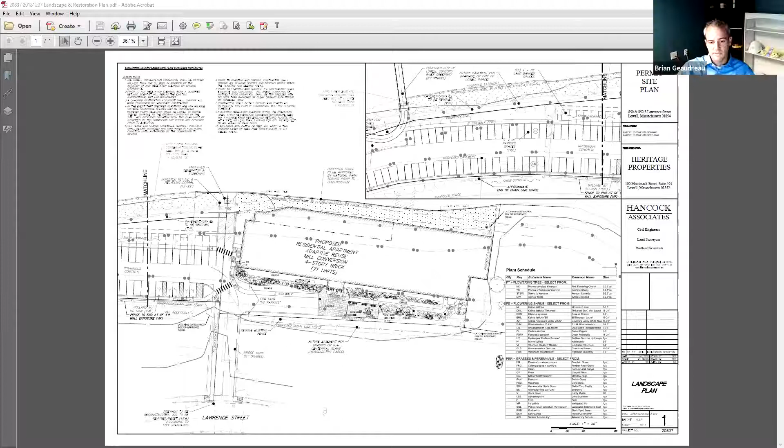I'll offer a motion to continue this request for certificate of compliance to the September 23rd, 2020 meeting. Motion made by Bill, seconded by Brad. All those in favor, wave or say aye. Aye. Thank you very much, Mr. John Joe. Thank you.

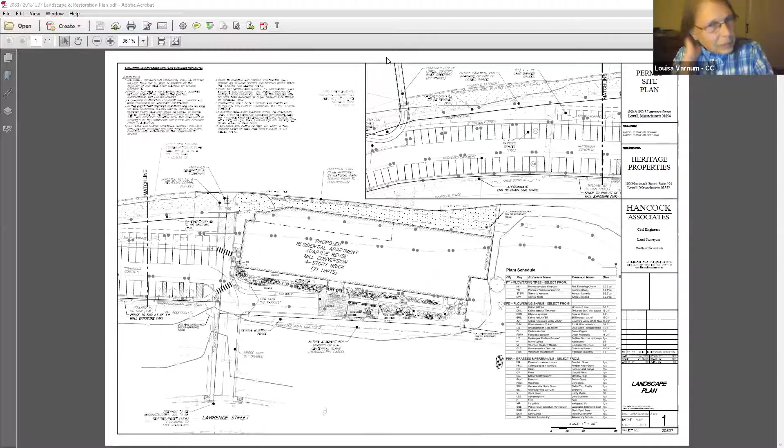Moving along on our agenda, we have a request for determination of applicability submitted by Hey Kim, 6769 Pratt Avenue, for a request to construct a deck within bordering land subject to flooding. This is the Middlesex Village area. We've got several projects tonight in this particular neighborhood.

I did take a peek there, but I didn't find anybody at home. Is Mr. Kim with us, or perhaps Miss Kim? Okay, can you tell us where you want to put your deck and how it's going to be constructed? Is it going to be ground level, up in the air, or what? We have a side deck right now that we just wanted to reconstruct.

It's just falling apart, the wood and stuff is falling apart, so we wanted to reconstruct the deck that's currently there. I don't think I saw the deck, is it on the side of the house? It's on the side of the house towards the back. I thought your proposal was right at the back of the house, I understand now. So it's a reconstruction of a deck.

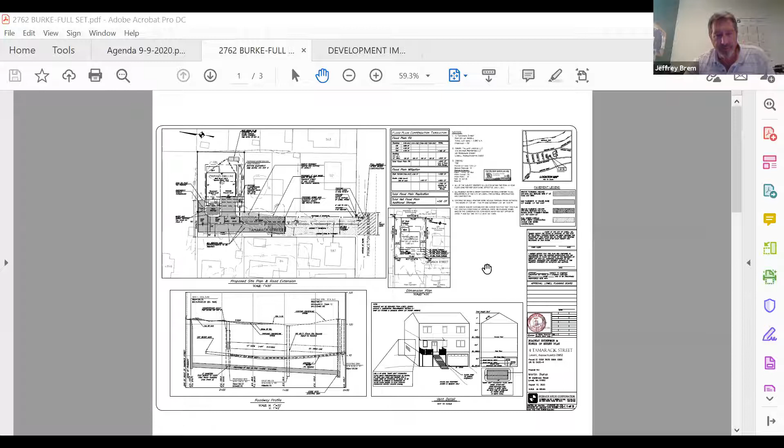Thank you, Scott. Madam Chair, would you like me to present? Yeah, Madam Chair, if I could share the screen - I think graphics are very important with this job. All right, this always happens to me. That's not what I want to share. Hold on a second, you'll have to give me a minute. I'm sorry, it should be here. Fine, all right, we'll try it one more time. There it is, all right. So does everybody see the screen? We see it, but it's very tiny. I'm going to zoom up.

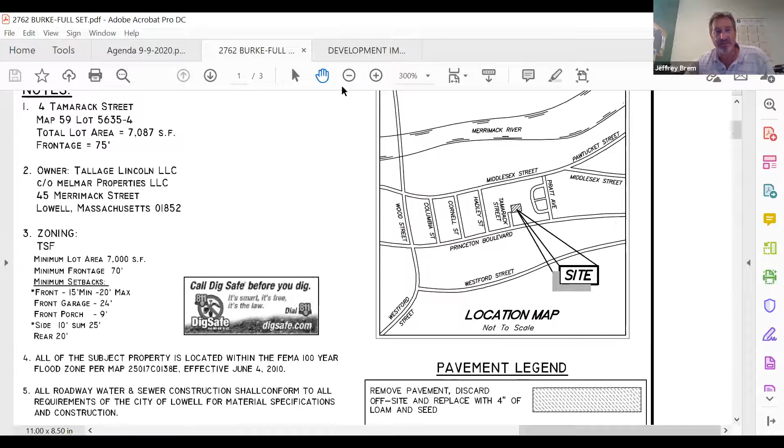So first, let me locate you on Princeton Boulevard. Here's our locus map to the right, and you can see Princeton Boulevard here, here is Tamarack Street. Some of the other streets in the area you may know are Hadley, Wood Street, and Westford Street. It's at the end of Tamarack Street - so this is the location. As John said, and as you mentioned Madam Chair, the property is 100% in the floodplain. Actually, Tamarack Street is partly in the floodplain too. So here's Princeton Boulevard to the right of this plan.

Tamarack Street goes in, and right about where the K is, that's the end of the pavement, and then this portion narrows up and becomes a dirt roadway. That's shown on the profile here.

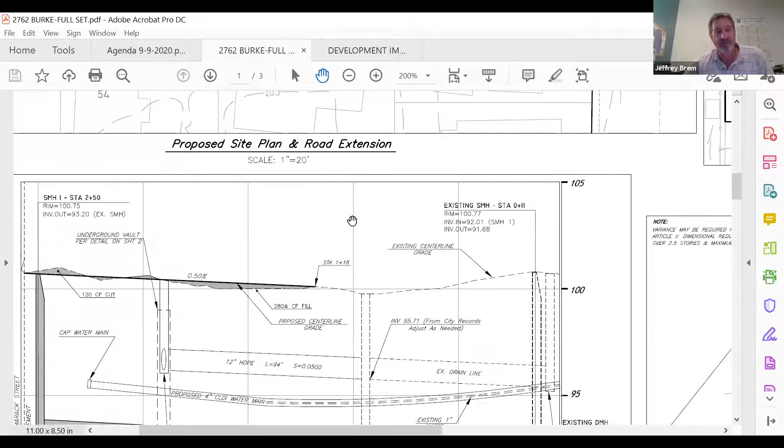There's the paved section, and essentially this is the dirt section here. You see some filling and some cutting. It's pretty marginal, but it doesn't matter whether it's marginal or not. If it's floodplain, it's floodplain, and we have to mitigate for that.

The property is currently a vacant lot, just over 7,000 square feet, 7,087. It has adequate frontage area. It's basically a buildable lot. The only issues are that Tamarack Street needs to be extended, and of course, we're working in the floodplain.

So in order to work on the floodplain, there's various programs that we've employed. The first is, the only work really that we're doing for the property is the foundation itself on the building, and we're mitigating that, which I'll get to in the storage component a little bit.

In the foundation, we are proposing 4 smart vents at various elevations, because as you know, if you're filling floodplain, you have to incrementally create mitigation at its incremental elevations. So there are 4 vents, 2 on each side. These are the elevations here.

Essentially, all a smart vent does is it's a hole in the concrete. It seals up the hole during times of no flood, but when there's flood, there's a hinge pin, and it opens up and allows any flood waters to go into the basement temporarily during the storm. Then, obviously, there's no heating systems under code in the area that's in floodplain. You have to have all your heating systems above the ground, above the floodplain, and so forth. So it's just an open basement.

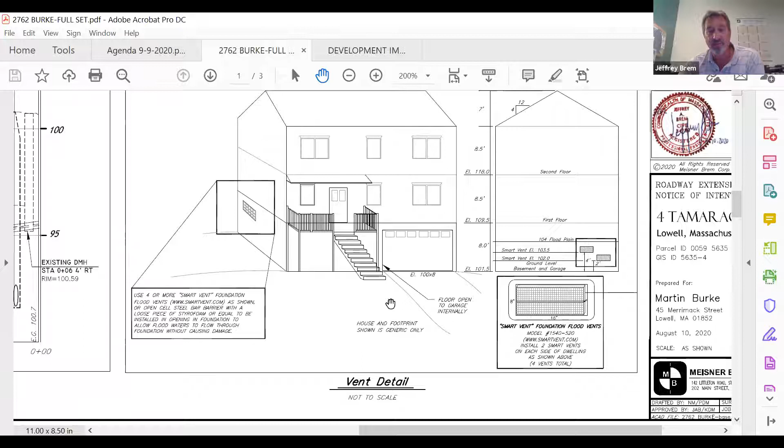So that's how we take care of that, and that's done several times in the city. However, as mentioned earlier tonight, the concrete itself is filling, and you've got to mitigate that as well. So we have basically a several system program for that.

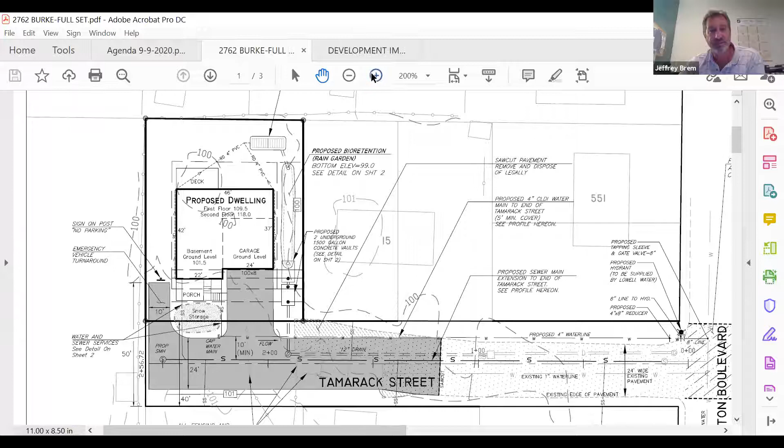First, as you see in the rear, we have roof infiltration drains. So the entire roof runoff is going into this Cultec system, plastic chambers, and they over drain into, and also the surface drain in this area. We're proposing our bioretention rain garden,

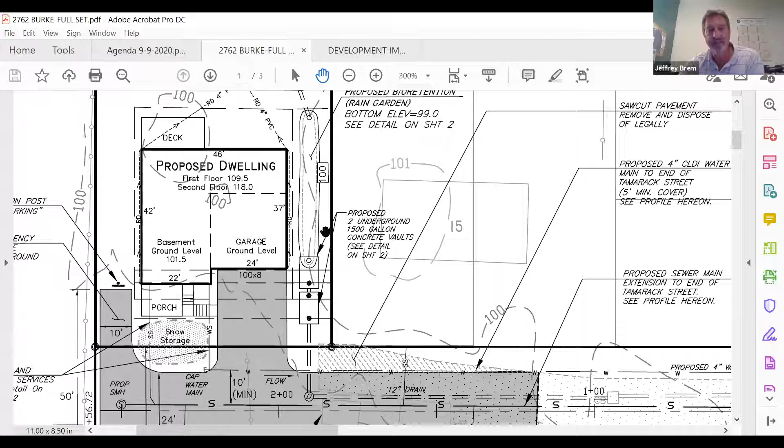which will obviously help mitigate the flow. It'll also polish the runoff from the site. And then that goes into these 2 chambers.

And this is what's unique about this property. The flood's going to go into the chambers at a certain elevation. And these 2 storage chambers, which I believe there's a detail here, we're on the next page. These 2 chambers will store the flow.

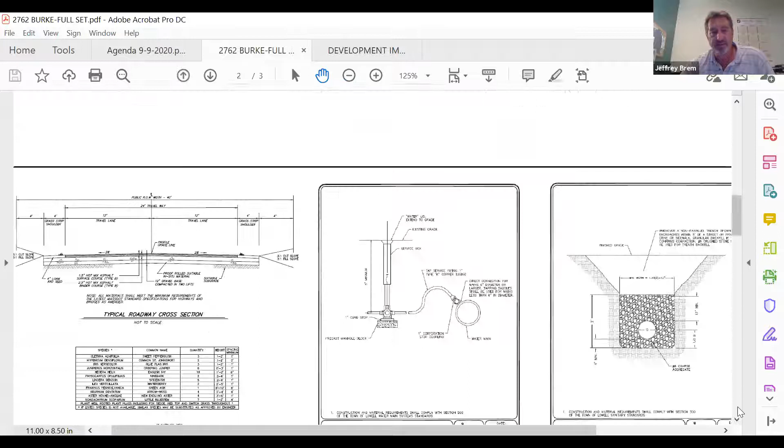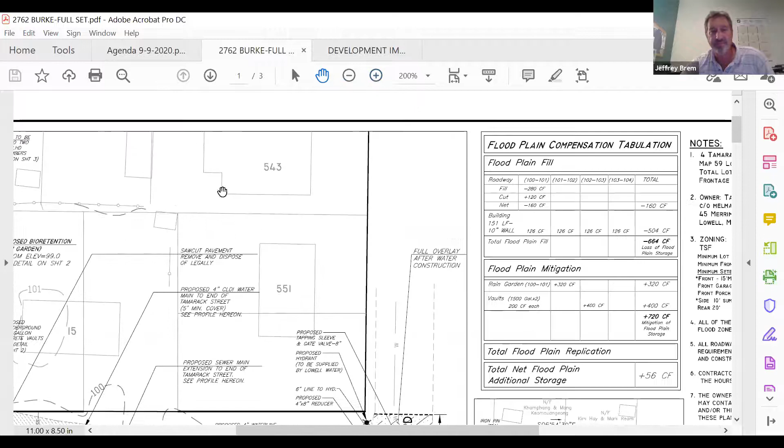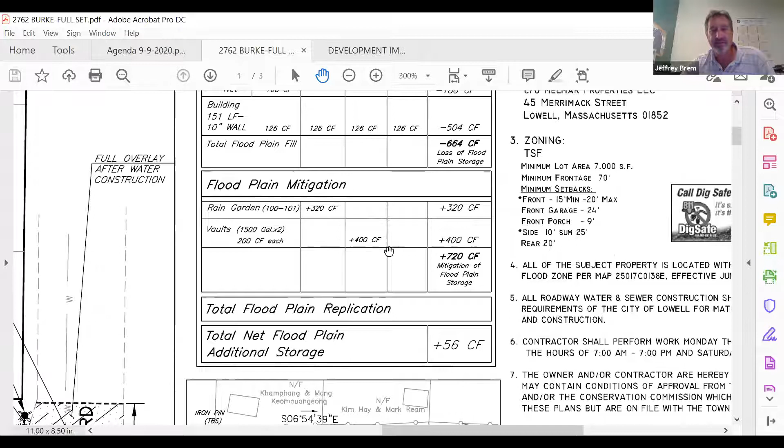As I said, some of this is in the roadway that we're losing some floodplain, some of it's in the building wall itself. Although these are small numbers, they are still numbers that we have to meet. So we have 664 cubic feet of loss of floodplain storage. And between the rain garden and the vaults, we're having 720 cubic feet of increased storage volume at its incremental elevations. So we have a net gain of 56 cubic feet.

The gain is not important. The important part is that we're mitigating for any loss of flooding.

John mentioned some other work, and just so you know, we are extending the water line. There's no flood issues with that, obviously, other than working in the floodplain. There's no filling. We're extending the sewer line, same issue. There's no work.

And we are putting a hydrant in, which will help improve the neighborhood. We're going to tie any properties that are not tied into the sewer. There's an existing 1-inch water line right now. The neighbors are going to get at least a 4-inch line. It's 8 inches up to the hydrant, then it's 4 inches. So that's why John had mentioned that there's sort of an improvement.

At the end of this is kind of a dumping ground. There's puddles that form. So all that's going to be resolved with the construction of a house on an approved, legally permitted property. That's it for me.

I'm sure you have some questions. Yeah.

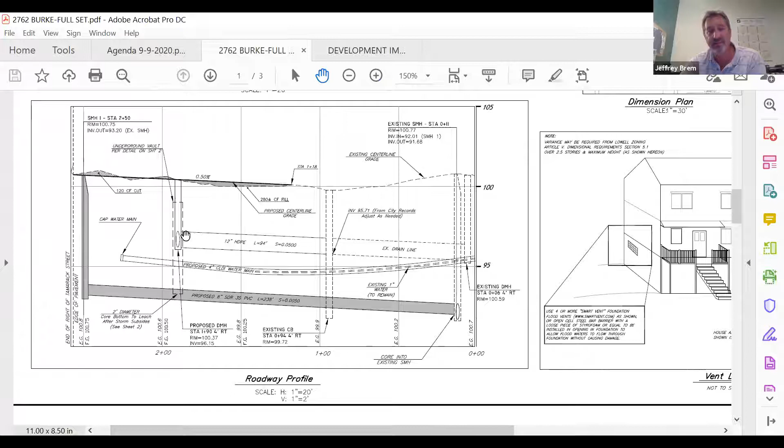Could you describe the drainage out of those tanks, how is that? That drains into an overflow pipe going into the street, and we're extending it with a 12-inch drain line to the existing drain line. So it's going into the storm sewer? You're correct, which is separated from the sanitary sewer.

Is that a constant thing, or does it only happen when it floods? No, only when it fills. There's catch basins on the road that'll take care of it.

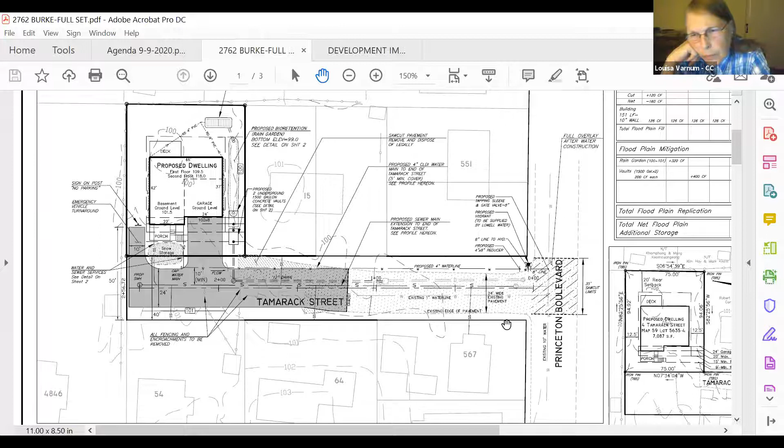The other good thing you brought up is that I'm maintaining a positive grade of 0.5%. At one point I was going to create a low point, but it was so close that we did a little extra filling to avoid that, so all this flow will go down to the existing catch basin. Oh, it's existing.

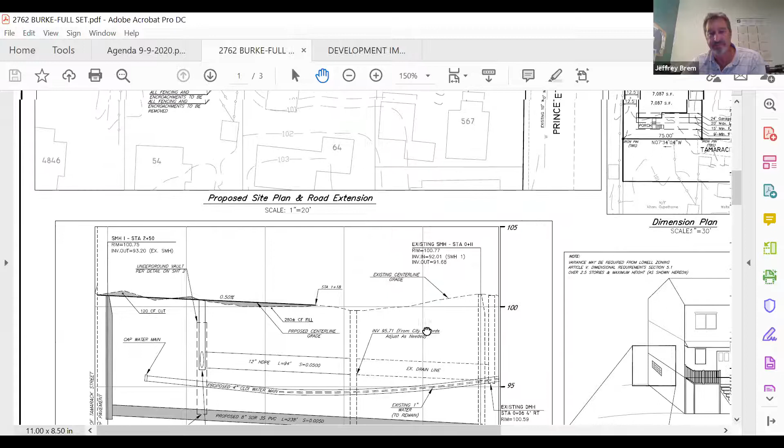Are you concerned about the level of the groundwater, and have you investigated what level it's at? Well, as you see from the plan, the building is basically being built up from the ground, so if the groundwater is below grade, it's just going to be in the footing.

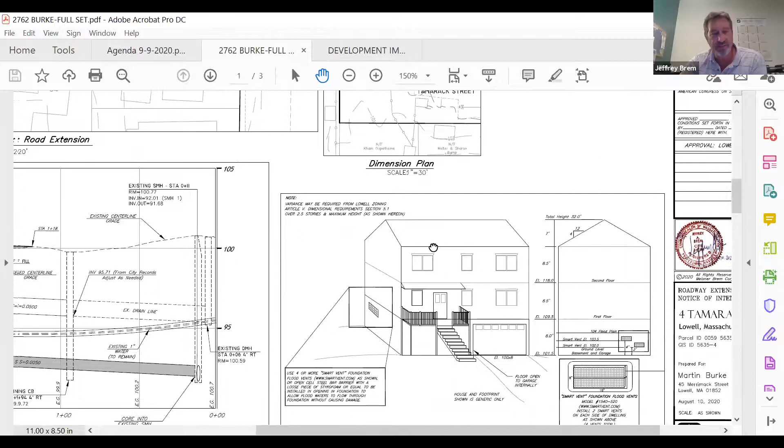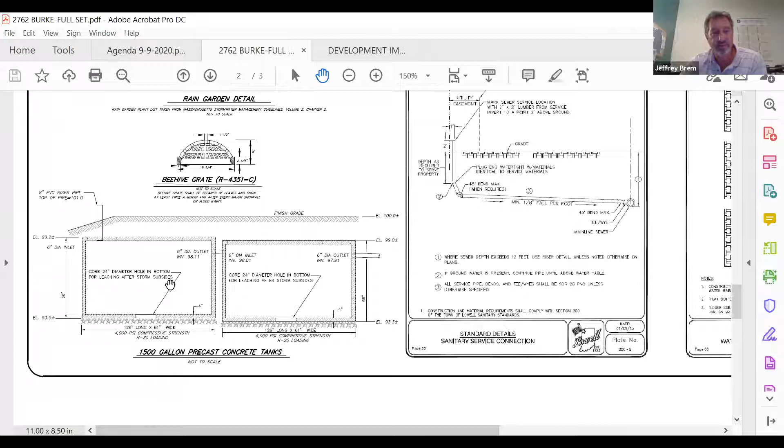Well, I was thinking in respect to the tanks. Oh, the tanks themselves? No, that's a good point. I haven't done buoyancy calculations on them, but they're concrete tanks, they're heavy, and they're only a little bit into the ground, let me go to that page. They start right near the surface. A lot of the groundwater problems happen when tanks are much lower than the surface. So it does go down about 5.5 feet.

But they're not perforated on the bottom or anything, you don't expect? Actually, sorry, they are. This is a 24-inch core on the bottom, so at the end of the storm it'll drain out. So it's not a perforation exactly, but there is a core.

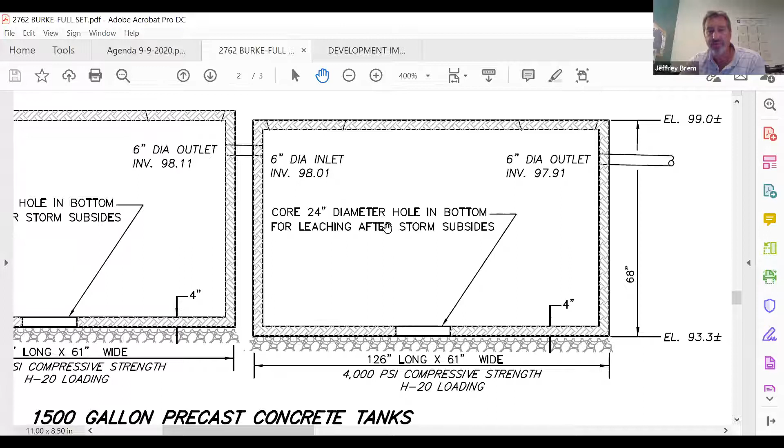Wouldn't it be important to know whether you're going to be in the groundwater when you put those tanks in? Well, with that core, you're not going to have the buoyancy problem because we actually have an open bottom for a 24-inch diameter. So your tanks could be filled by a foot or more at all times if the groundwater is at a higher level, which it isn't right now, but...

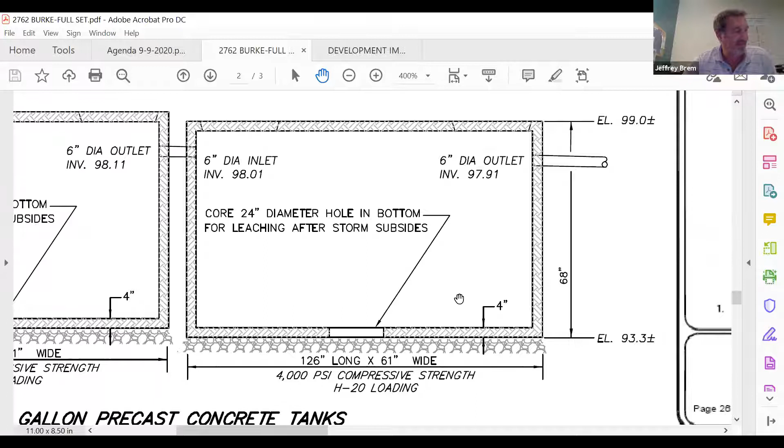That's a good point. We did check, and it's been a while since I designed this, but we checked the flood elevation of the river, and I believe it's 10 feet below. I could check that, Madam Chairman, and if you wanted to make a condition that we verify this floodplain is below 93.3 with your engineering department, we could do that.

Maybe another way to look at it, Louisa, I think what you're getting at, if I'm not mistaken, because I'm just trying to get clarity myself, is whether your sizing of this storage tank considers water table elevations, so that you're not losing storage capacity because it's partially constructed within the water table.

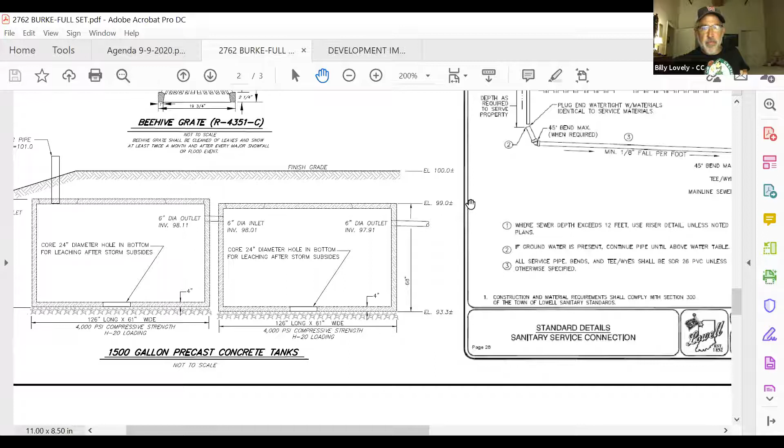I understand that. Because it's constantly draining, is that what you're saying? Yeah, obviously eventually, when you're no longer in flood stage, the water table has got to be sufficiently low enough to allow for free drainage out of that tank into the aquifer below. Mm-hmm. Correct.

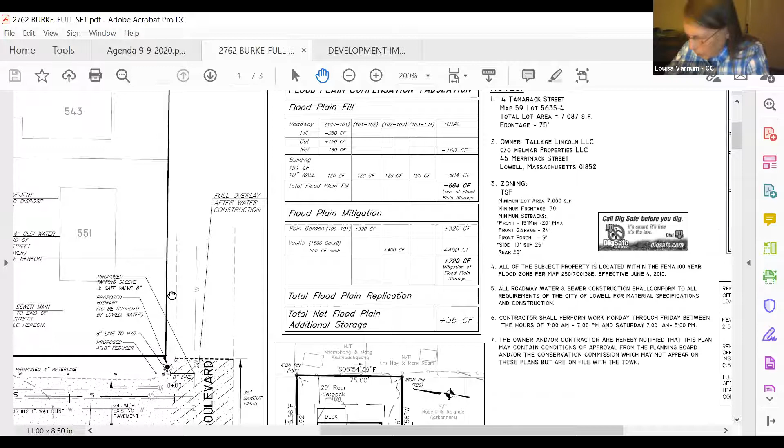Well, I was just curious where that level was. I would think that would be important, but maybe it isn't. No, I think it is. Agreed. And I also wondered about a maintenance plan on those tanks, what do you have to do to keep them functional?

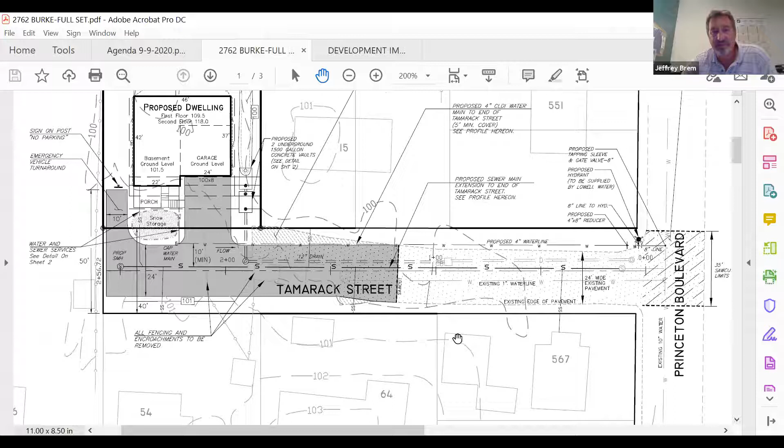They're just concrete tanks, just like a septic tank or any concrete tanks that have a 30 or 40-year life. If you needed to put a condition in, every few years somebody just inspects them, they will have risers to the surface.

So you don't have concerns about siltation taking up pore space underneath and hindering the free drainage? No, because... I was just pulling that detail. This is how we designed this. It flows in above, see, this elevation is 101, the bottom of this rain garden is 99, so it's 2 feet above the rain garden.

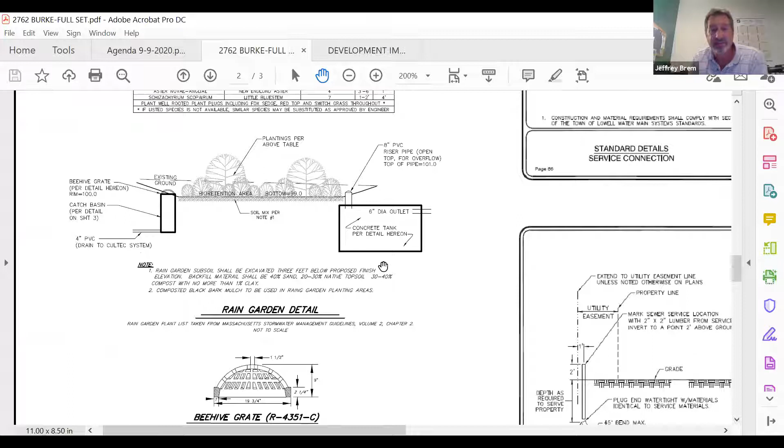So I guess the only issue would be if the rain garden filled up with silt, then it would spill into the tank. Right, so there's your maintenance right there. The rain garden has a certain maintenance criteria. We do have an O&M plan that we submitted, and this is the planting plan as well. Okay.

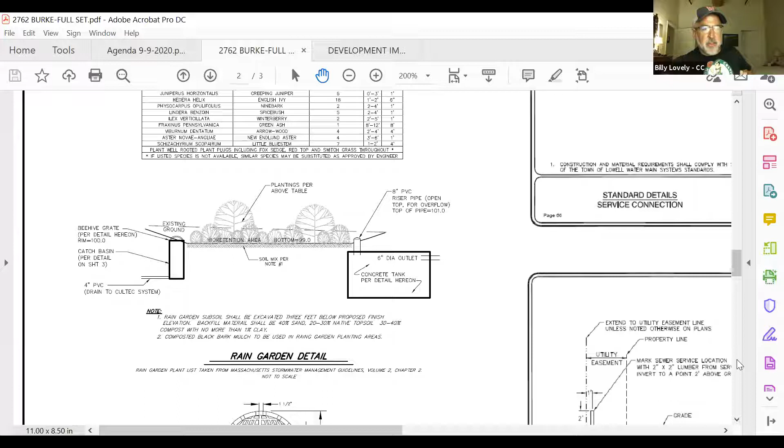I had two other quick questions. So in terms of the outfall, just to confirm, this area complies with the MS4 permit requirements. It's separated stormwater and sanitary. Correct.

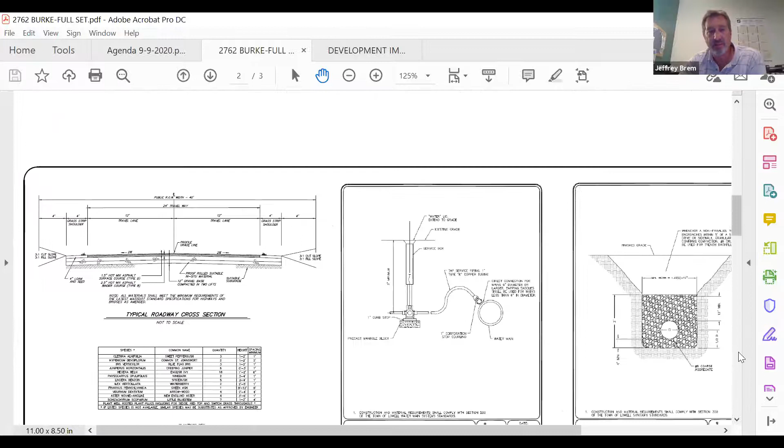All right, and the city allows you to connect your discharge to the existing stormwater, not required to discharge on site. In other words, manage your discharge within the periphery of the site and not overload the city stormwater system. That's what this bioretention facility is. When it fills up to 2 feet, it goes into these tanks and then drains out. So the tanks basically have a dual purpose. They eliminate the connection to the city during the normal storms of the year, but during heavy storms, when the backup of the river comes, the flow comes in and the tanks act as storage volume. You can see that because the outlet here is raised.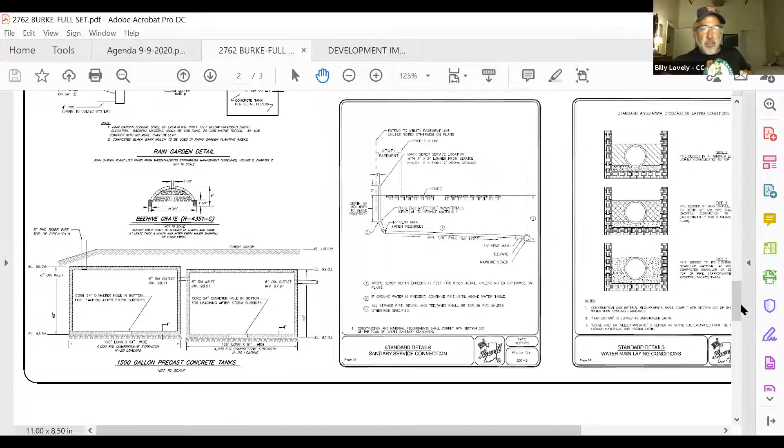Okay, and what about - I think I know the answer, but let me ask it - with respect to overall recharge from this project, impervious surface, are you reducing, increasing, or no net change in impervious surface? Well, it depends on what storm you're looking at. That's the ultimate answer.

We're supposed to do annual recharge. It's a requirement, and we meet the annual recharge. As you look at a 2-year storm or a 3-year storm, obviously it's not going to, but the annual recharge is one of the 10 standards we have to meet. We meet it.

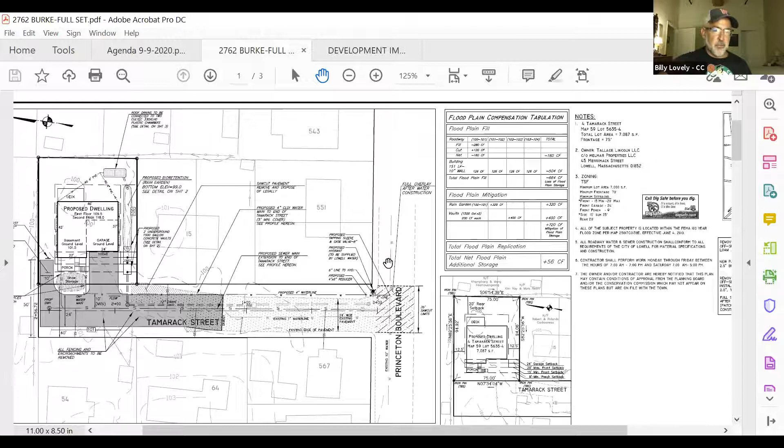So bottom line is your no net loss, yet actually a de minimis increase in flood storage capacity with this project. You're not running counter to the city's MS4 permit requirements in terms of how they manage their stormwater. The system is sized large enough for your typical storm and maybe even a more intense storm. So you're not going to run into any flooding issues. We have to take a half inch of rainfall and run it over that impervious area, to make sure we meet that annual recharge.

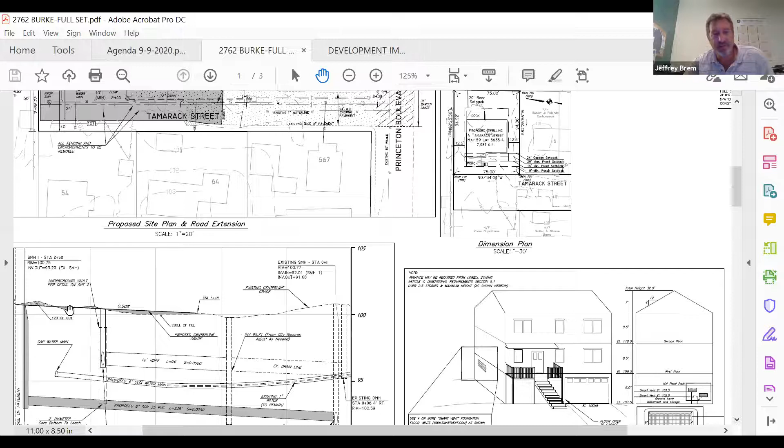I think it's stated in their application that they did include it. Is that right, Justin? Yep, we did include this portion of Tamarack Street. Not the section that we're not changing. Right, just the darker gray section. The darker gray section, correct.

Okay, great. Now you have the rain garden pretty well set forth there as far as what your plantings are going to be. Are there plantings for the rest of the lot? I know it does have a few trees around the edges, but it's basically lawn area. Were you planning on planting some trees?

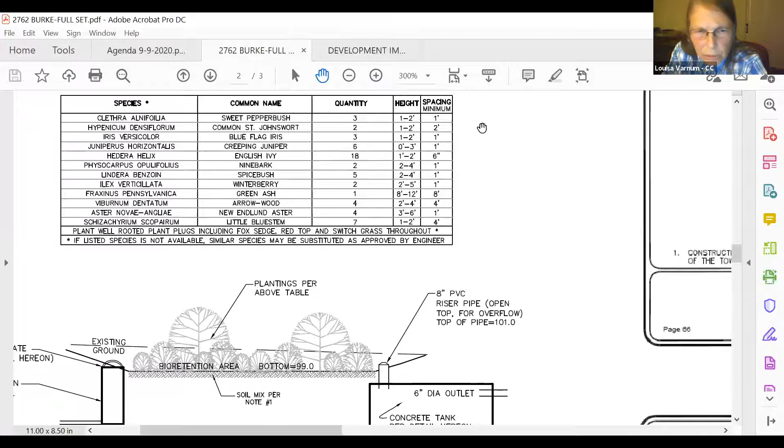Those are great for taking up rainwater as well. We haven't shown any landscaping, Madam Chair, but the front of the property is pretty much taken up between the tanks and the porch and the steps. But in the back, to the side and the back, if that was a condition of approval, we could plant a few trees, especially if you have a certain type in mind. Well, something deciduous probably.

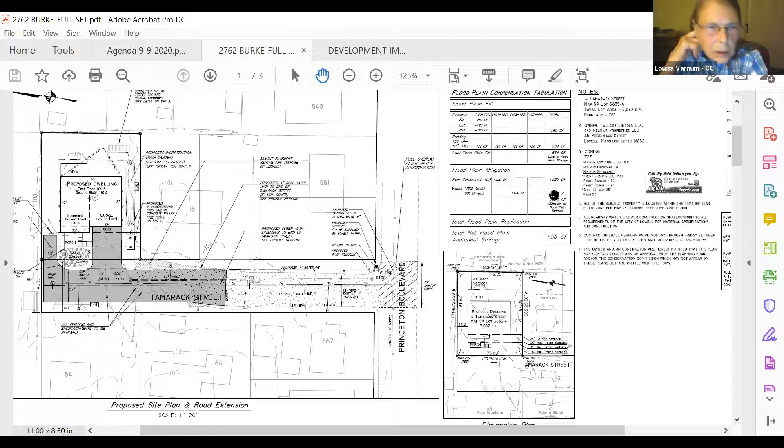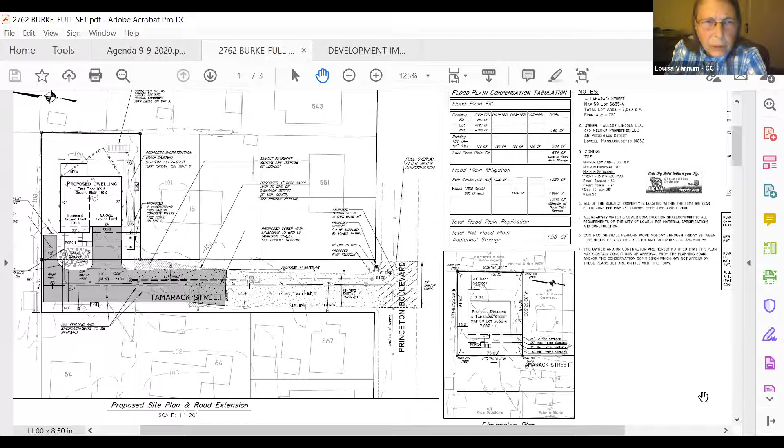There, kitty corner to this property, is an apartment complex. I'm sure if there were any trees planted to buffer that apartment complex from this property, that would be a good thing. We did receive a letter of concern about the project from the apartment owners. I think probably some buffering there would please them. We can certainly do that, Madam Chair. We'd do whatever you wanted as far as some buffering in the back. I think that would not be an issue at all.

Well, I've come to the end of my notes. Does anyone else have questions or comments on this particular project? Looks well done, I think. I'm good.

So I have at least 3 special conditions, I guess. Let me open it up to the public first, if the commission's all set. Is there anyone from the public that would like to ask questions or make comments about this proposal on Tamarack Street? I can't see the list of attendees here anymore, so I don't know who's here and who isn't. Okay, hearing none, do you want to close the public hearing?

I'll issue a motion to close the public hearing. Motion made, seconded by? Second, Brad. Seconded by Brad. All those in favor? Aye. Aye. Aye, okay. And now, do we have a motion about an order of conditions?

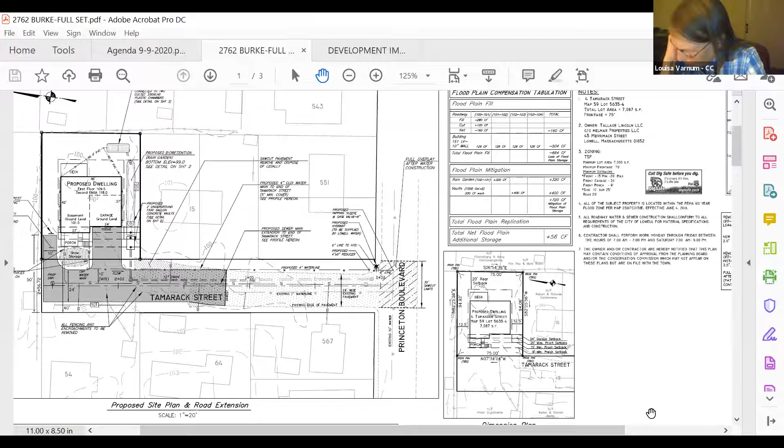I have at least 3 things that the applicant has pretty much agreed with: something about the groundwater, a maintenance plan for the tanks, and something about plantings around the backyard area, either buffering or helping to alleviate any water concerns.

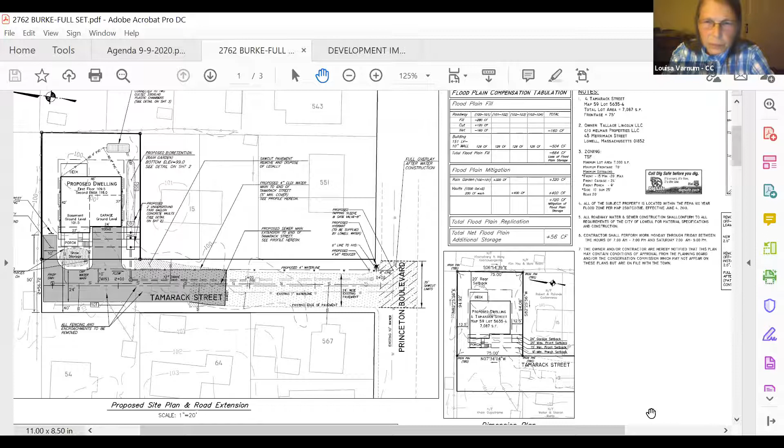I'll make a motion to issue a City of Lowell order of conditions, along with 3 special conditions. One, to verify the sizing of the storage tanks considering groundwater elevations, so that there is indeed the full storage capacity of the tank. Second, an operation and maintenance plan for said tanks. And third, to propose some sort of buffered plantings between the back of the property and the abutter.

We have no objection to any of those, Mr. Lovely. Thank you. Okay, I'll second that motion. Motion made and seconded. Is there any additions or comments about the proposed motion?

Okay, we'll have a roll call vote, please. Chairwoman Varnum, yes. Commissioner Lovely, yes. Commissioner Dillon, yes. Commissioner Butenheis, yes. Commissioner Downs, yes. Commissioner Standish, yes.

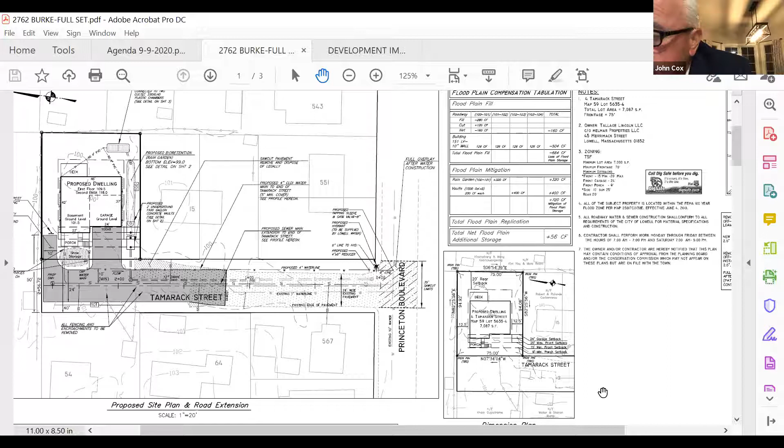Okay, thank you, and thank you for coming in. You'll get that order in short order, I believe. Thank you very much, Madam Chair, and thank you, members of the board. Thank you, good luck with the project. Good luck. Yeah, thank you very much. Appreciate the comments. Have a good day. Thank you.

Okay, next we have an enforcement order. There's some very patient people, the Raposos have been here since the beginning of the meeting. The address is 48 Perron Way, and it was concerning cutting and removing trees within the 100-foot buffer to bordering vegetated wetlands.

I think we've had several conversations between the office, myself, and the forestry people, and the Department of Conservation and Recreation, I believe they've talked to. The upshot is that the trees are down. They were off of the property line onto the conservation area. There is a fairly well-defined drainage ditch. I would not call it a stream, but it's obvious that drainage goes through there in storm times. I believe it's actually connecting to other pieces of wetland, which may be more than 100 feet from this particular taking down of the trees.